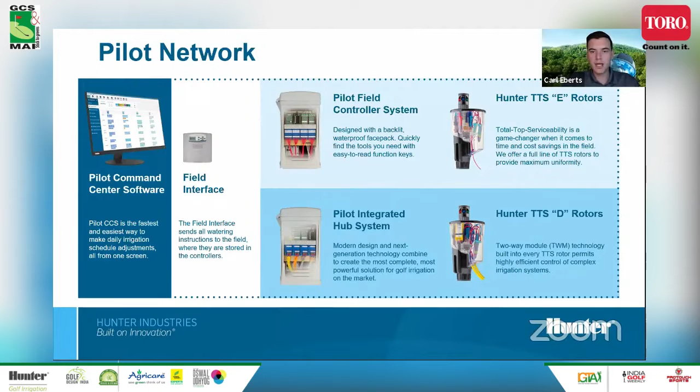Here's a graphic explaining the differences. In the two-way module system, you have a single controller with wires going out to the rotors, daisy-chained one to the next. This saves significantly on wire cost, especially now where raw copper is going up in price. You can get away with one hub or controller there, handling up to 999 rotors or stations on that single hub. But if you have wiring already in the ground going out to each rotor, that would be a conventional system, where you're going to have more controllers and more wire — but there are advantages to this as well. Each one of these controllers can control up to 80 stations or 80 rotors.

Both of these systems are capable of both wireless and hardwire communication. Shown on the right, you have radio modules talking from the central office out to the controllers. But it could be a hybrid system, and in some situations it's wired as well, from controller to controller.

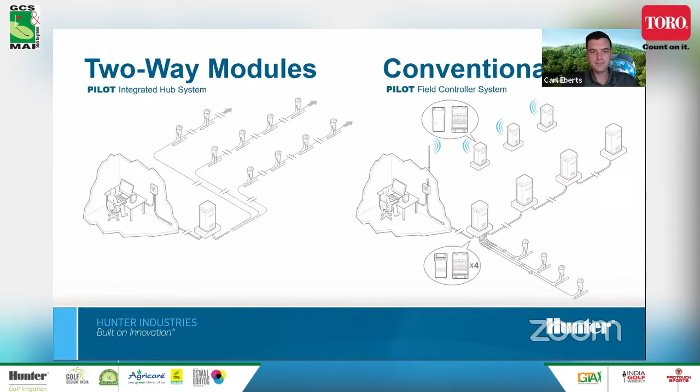Getting into the rotors specifically, we have a good, better, best offering. The entry level is the B series, which stands for a block rotor. This is a system where you have a handful of rotors controlled by a single valve. Often you'll see these looped on greens.

The better option is our G800, which you saw in the video. This is good for conventional systems — the flange compartment's not as big for housing all the decoder components. And that's really where the birth of this TTS 800 series came from, our best and top-of-the-line rotor now, which is what we'll focus more on the features of as we get into this.

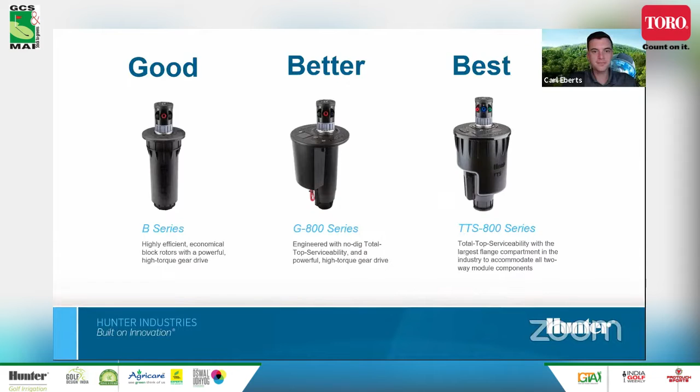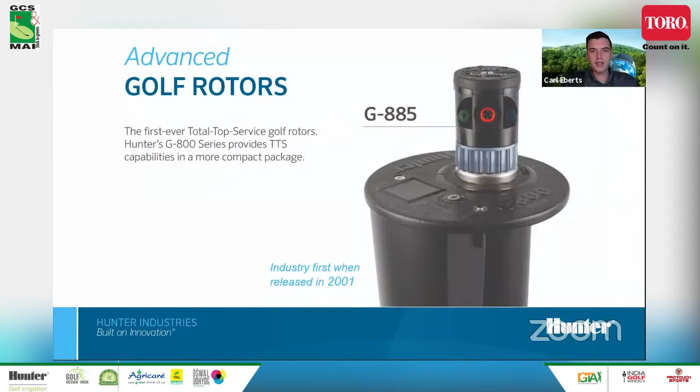As mentioned in that video, the G800 was the first total top serviceable rotor, released back in 2001. There's been a lot of development on it since, with incremental improvements. This really started the total top serviceable movement and has been a really successful rotor. But with the advancements and adoption of decoder systems, we launched the TTS 800 series rotor in January 2020, and it's really taken off now. As you can see, the flange is significantly bigger. The internals are the same — this drive system has been around since 2013, so it's very much field proven. But the body is fully redesigned from the ground up for modern irrigation systems, and we'll get into more details on that.

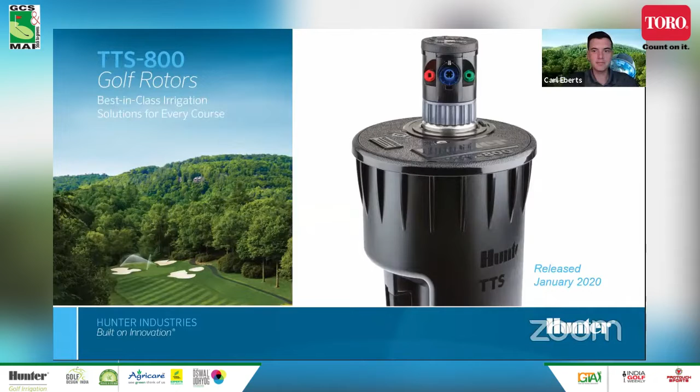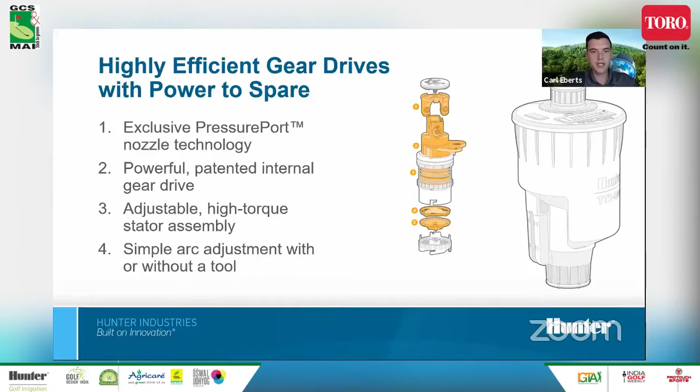There's an adjustable high torque stator assembly, so you can adjust the speed of rotation. And then the simple arc adjustment we'll show you here. With this tool, or you can just do it by hand, turning that adjustment collar makes it very easy to adjust and set the arc in the field exactly how you want to.

The stainless steel filter is a mesh filter screen that protects the control components up in the flange. Our proprietary Filter Sentry design actually cleans off that filter with every activation, so it's designed to clean itself and minimize the amount of time you'd have to service it with dirty water.

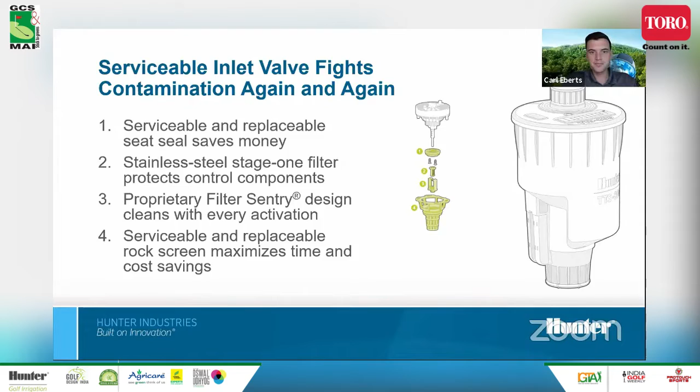So we found that although it's designed to be easily serviceable, you're not having to service it as much in the field.

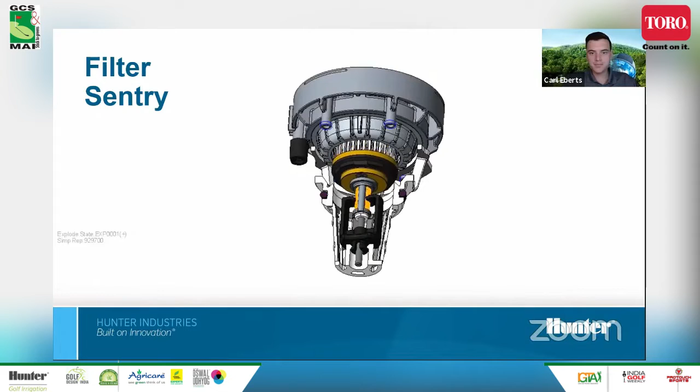But of course, if you have dirty water or growth in the mainline pipes, it's possible for the inlet valve to get clogged. So here's just a couple slides on how easy it is to service. Just a quick turn of the rock screen, and that can be taken off or replaced, cleaned out or replaced.

Once that's off, even the little mesh filter screen can be pulled off and replaced or cleaned. And then finally, the seat seal that seals on the rock screen when it's closed. Removing these two screens, it can be pulled off and replaced as well. All those components are a lot less expensive to replace and service than an entire inlet valve.

This is a great feature as well, the servicing of the regulator and solenoid without depressurizing your entire system. The selector switch, number 2 there, can be turned to the on, off, or auto position. When it's in the off position, it actually isolates the flow from the valve, stopping it from going to either the solenoid or the regulator.

So without having to shut off your isolation valve down the line, you can just turn the selector switch to the off position. You could take out the pressure regulator and adjust it, or if you had to replace the solenoid after a surge event or something, it makes it a lot easier and saves a lot of time.

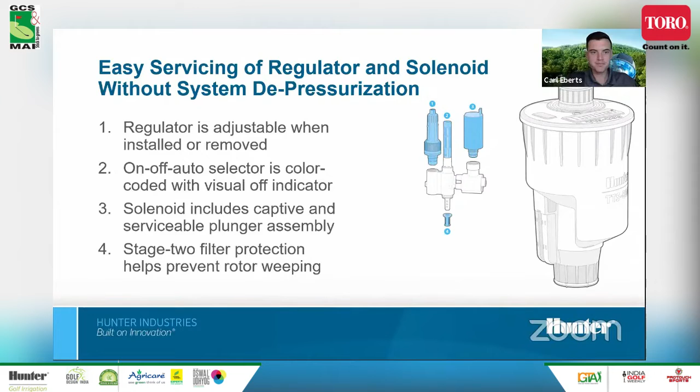So without a TTS system, you could easily be looking at an hour of work just for a basic routine maintenance. You're going to have to shut down the water on the main line, make sure it's drained enough to bleed off the pressure, dig out around the rotor to access the serviceable components, take off, say, the solenoid if it was hit by lightning or surge, and then you're repairing the turf around it, leaving unsightly scars.

With this total top service technology, it's really 15 minutes or less, turning it off at the rotor. As I mentioned, the selector switch turned to the off position, opening up the lid compartment, just the quarter turn screw, quickly replace any components, close it back up, and you're good to go.

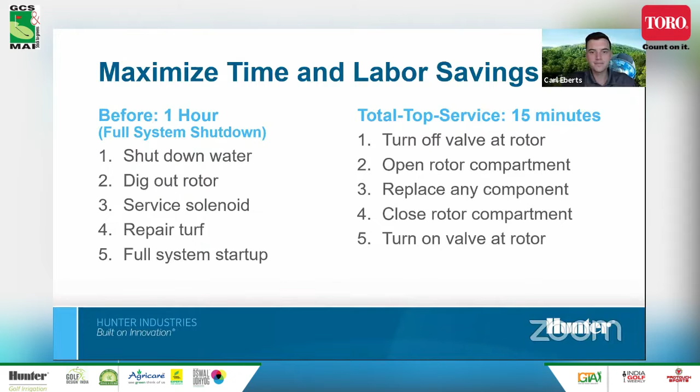So we'll switch gears slightly and talk about distribution uniformity, which is a major feature of all our rotors and is really key to maintaining a pristine course. We'll also talk a little bit about some of the maintenance practices you can implement to improve distribution uniformity.

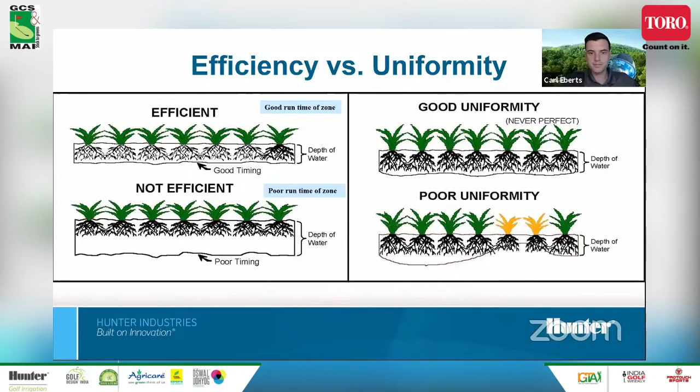So how do you improve distribution uniformity? Ensuring rotors are level is basic but very important. Confirming rotor-to-rotor coverage is next. If this is not the case, there are a few things you can do, like changing nozzles or increasing pressure. But if you go through all these maintenance practices and still don't achieve good distribution uniformity, it's probably time to consider upgrading your irrigation system with the latest rotor technology.

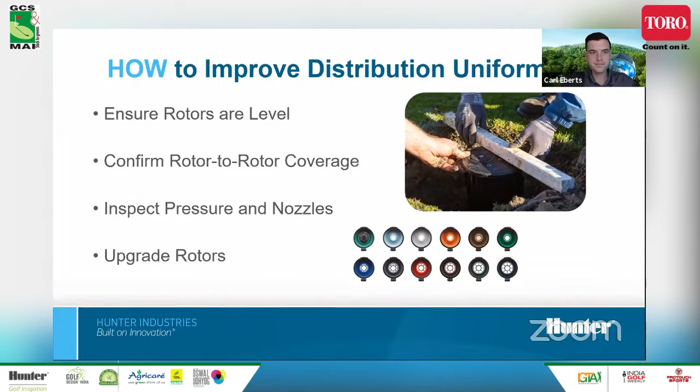This first thing may sound obvious, but with settling over time, rotors can become not level or flush with the surface, and it's really important that this is level to achieve optimal watering performance. Also over time, top dressing or settling can leave rotors significantly lower than the surface. In this case, rotors should be raised to be flush with the surface, preventing shorter range nozzles from hitting the edge of the ground around it, which would negatively impact performance - you just won't get enough water in the short range areas.

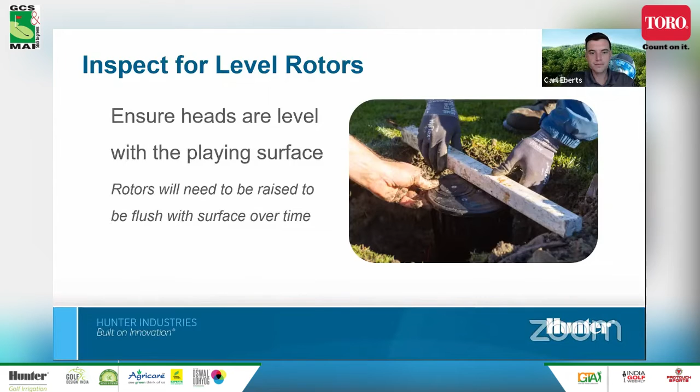The rotor should be throwing water all the way to the next closest rotor. This is often referred to as head-to-head or rotor-to-rotor coverage. In this diagram you can see how a properly designed and performing system has all rotors covering the distance up to the next closest rotor - part circles on the sides going 180 degrees reaching across, and 90-degree rotors in the corners also making it up. This leads to the most uniform coverage throughout the area.

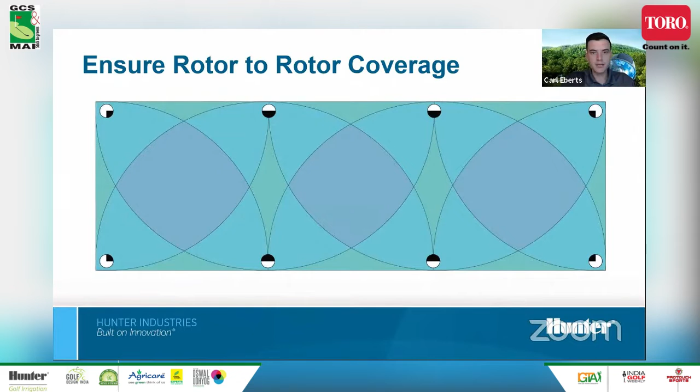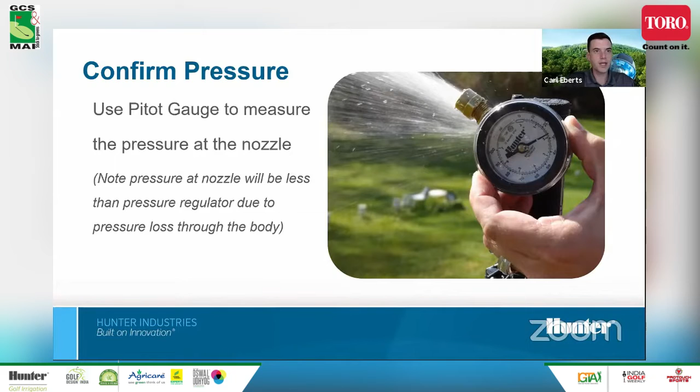If you're still not achieving head-to-head coverage but have good pressure, it's possible you need to switch to a larger nozzle to get further throw on the radius and achieve head-to-head coverage. We offer a large range of nozzles to fit the needs of every application, and these can be easily switched out in the field.

Also, it's rare, but it's possible for debris to damage the nozzles over time, which will negatively affect performance. If this is the case, the nozzles would need to be replaced. Now, if these general maintenance steps have all been done and you're still not getting good uniformity, then it's time to consider replacing your rotors with the latest technology.

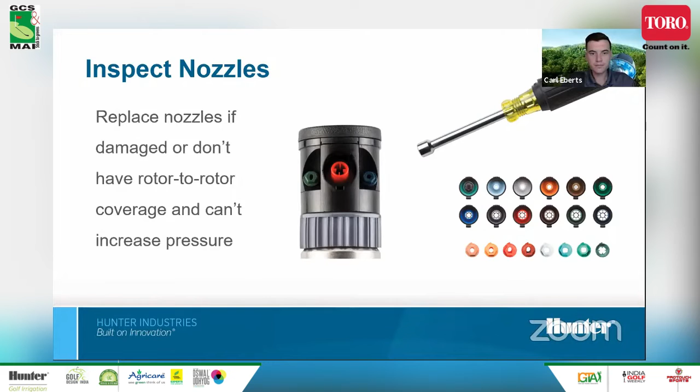The rotors in the ground were calculated out to a 69% distribution uniformity, or a runtime multiplier of 1.23, meaning you'd have to run the rotors a lot more to get water to those lower areas. The Hunter rotors showed a distribution uniformity of 91%, a runtime multiplier of only 1.06 - much more efficient in the application of water.